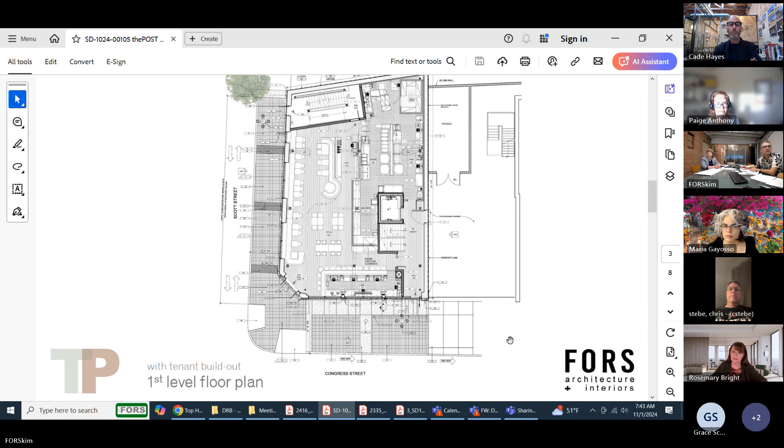Any questions? I'm going to go to the facade and show you the minor modifications from here. I'm going to zoom in a little bit, because it's really about these two facades.

In the previous design, on Congress Street, there was basically three or four changes or minor modifications that we did. One, the windows were operable. The windows are no longer operable.

These windows went back to the previous photo that I'm showing you, based on the national back and forth for months with national approval. So this is the spacing and the size that they wanted on the windows, and also the base they wanted on the windows. So these windows are no longer operable in any way.

We are lucky enough through the demo process to be able to expose the original cast iron columns, so the facade is the same, no punctures, no changes to the facade. But these are fine-tuned details that we did with the National and with SHPO. We also eliminated the more modern glass doors that were frameless with modern hardware, and they wanted us to go back to a single pane standard that fit the era of the photo I was showing you. On the columns, which is really the largest change, we had faux stucco columns going in front of this facade to mimic these, because the facade had been changed so much that it was pushed out and wasn't in the original plane.

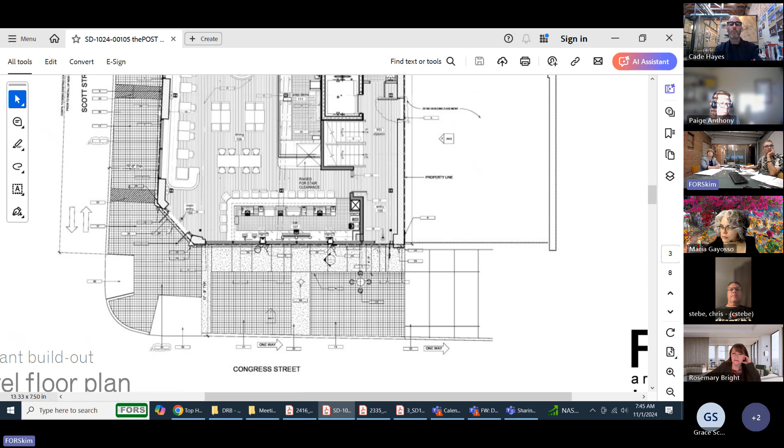Going back one drawing, the windows are back to being in the original position, and we have the original columns. We are painstakingly refurbishing and rehabilitating behind the metal. This is part of our demo process - instead of mimicking, these are the actual cast iron metal columns that we are refurbishing, along with the window spacing. This is them uncovered now; the GC has removed multiple layers to get back to them, and we think they're in good enough shape that we can keep them and refurbish them.

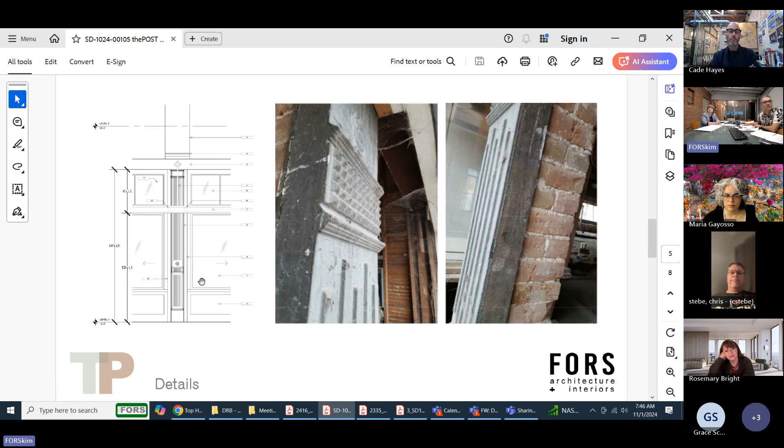So this is a detail shot of that elevation. Let me zoom in a little bit again.

The other item of change is they also really insisted on us keeping the original wood windows. So these are the original wood windows, and the composition of the original wood windows, which the owner and the GC are going to completely refurbish. Those windows mostly are in place now, but they're going to be rehabilitated and refurbished.

Let's see what else on the facade. I think, as you can see on this side, the Scott facade, the east facade, is the same item. There also we're going back to the original opening that it was originally. Right now the openings are below this line where my cursor is. We're going back to the original opening and to the original lintel height of the whole facade. That was in the original approved DRB, but the change here is the spacing of all the window openings and the mullions and the glass.

Again, no operable on this side, and the same thing with the windows here. These two openings are staying. The only change now, in the final drawing that HPZ approved locally, is we're going to change this to a window. The existing is a window, and we're going to keep the opening as a window and just replace it so that the frame matches the storefront framework.

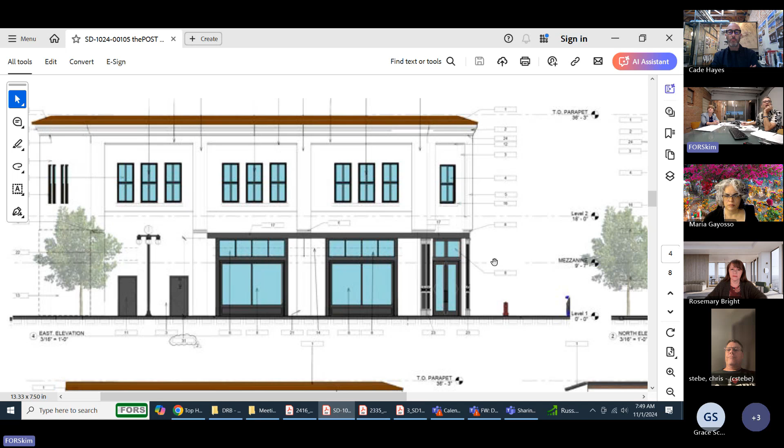The other item, and I'll show you the shade study, is that the National and Federal have approved it without the canopy. One of the reasons is they painstakingly went back to this facade, which was the open facade without a canopy - never a canopy on the east facade. So we've come back to that for their approval.

On the west facade and on the south facade, I will start with the west facade.

One of the reasons this project was originally connected to the Hexagon owner building—that building sold, and this building sold separately, so they're no longer the same owners of the two lots. So there was a large opening here that was eliminated, and we're retaining the original brick, with no change to that. The second item is the paint on the second floor.

We are retaining the paint, which is actually in good condition. We went over that with site visits with National Historic, SHPO, and more recently with HPZ. The guideline was just to keep the painted upper facade, which is in good condition, and not try to sandblast the old brick because of how soft it is.

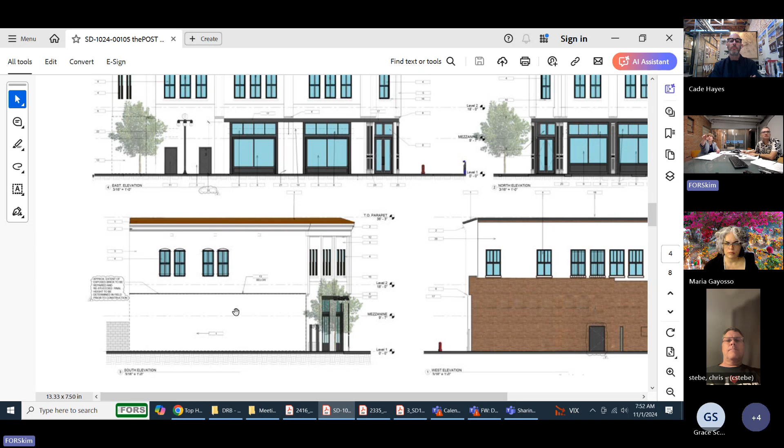You'll also notice, if you could zoom out a little—the south facade has that tile cornice, and so all three sides with that cornice would have the white stucco facade, so they would kind of wrap around and be more uniform in their look.

Okay, and then next piece—I'll move to the next page. Kind of went over this.

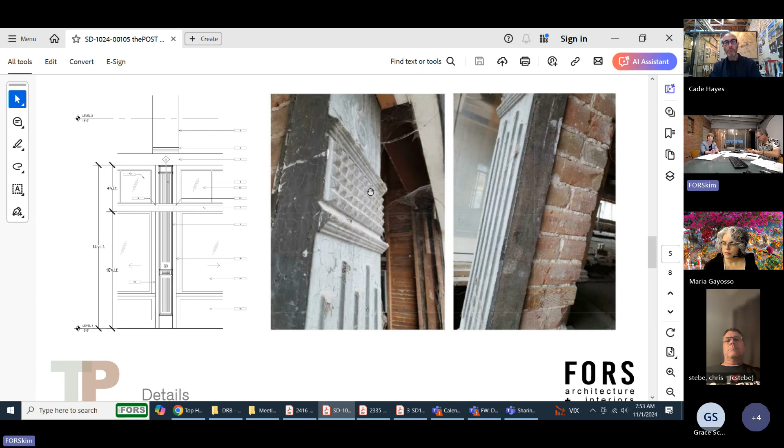I thank the city because the demo permit allowed us to uncover a lot of items that we could save, and that was a great find. So now we've removed a lot of structure from the building, and we have to stabilize the building as soon as possible.

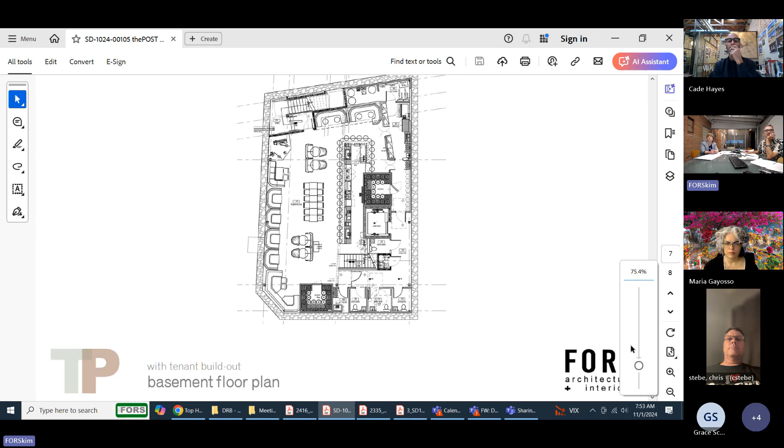I'm going to show you this and then go back to the shade study. This is the basement tenant. By the way, the tenant is the same on all three floors, but it's three separate concepts.

I thought you guys might be interested in this. I won't spend much time, but this is the basement tenant, which is mostly a bar, and also has all the bathrooms for the first floor and the second, for the ground level and the basement. It also has a lot of the backup storage and cooling, because the floor plates are so small at 3,000 square feet.

We really couldn't get a typical restaurant to work on the street level. So the basement is really supporting the street level restaurant and also providing a second concept, thank goodness, that has an open stair that comes into the bar.

And then on the upper floor, the second floor, this is a separate concept by the same owner. I can tell you who the owner is if you guys want to know—I think I'm allowed to say that, and I think Zach doesn't have an issue with that.

This is a third concept, which is more of a bar lounge and has a little bit of games—a separate concept. This kind of mimics something he's already done with his 9 other restaurants and bars that he owns. He has a very unique restaurant and food that he serves, English style.

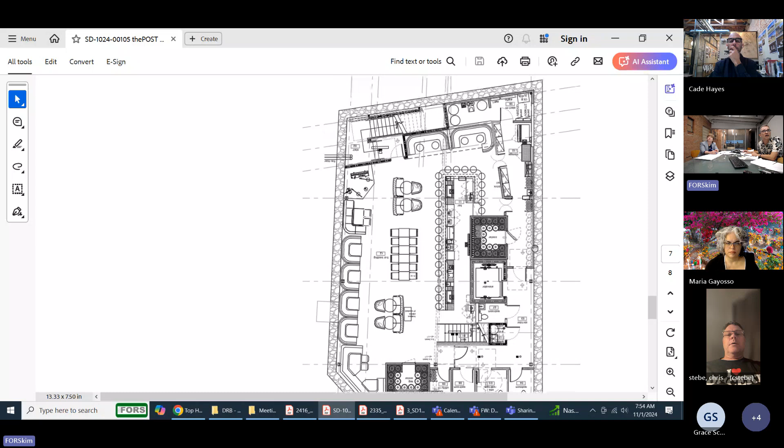So I think part of the hardship and change for us was when the time changed. One second.

When the time changed from the new mandate from 2 o'clock to 12 o'clock, it significantly changed our shade structure, but also dealing with national and federal agencies meant 8 months of arduous back and forth with them. Our shade right now, with adding the tree, only sits at 28%. And I know it's crucial that we're trying to get approval to get structure into the building to stabilize it.

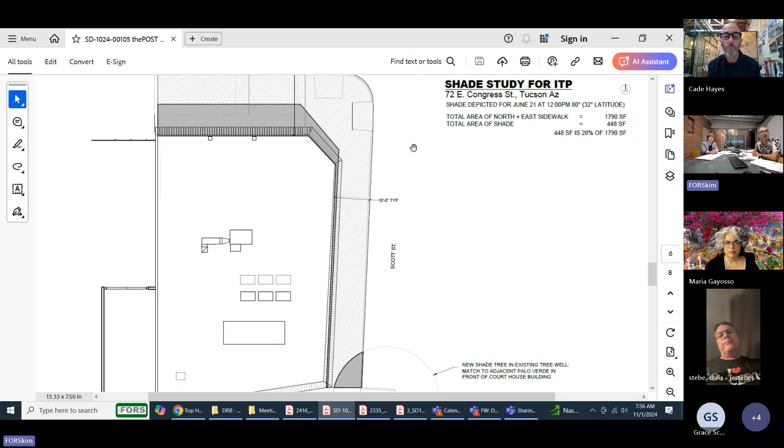Our hope was, based on the federal guidelines that we're maintaining for the facade, that we really want to maintain the new facade based on this shade study, which I realize is almost half of the required shade. I've done many downtown and I always meet the 50%, but this is one where we're just having a really hard time meeting it, due to some financial issues and the era of the facade we're trying to maintain.

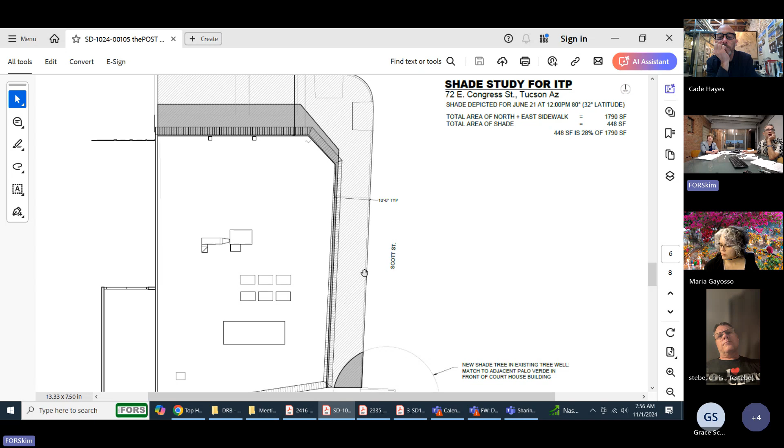There's also a lot of utilities in the ground, so we've shied away from adding trees in the ground. We know we can add this tree down here, but because of the narrowness, we've shied away from trying to do shade through trees. We'll discuss that now, but this is our latest shade study based on the approval we got Monday night, Tuesday morning.

So in closing for us, I know I've talked a lot and I apologize. I think our goal, now that we have the national federal SHPO letter and we had a great HPZ minor review for the modifications, we're hoping you guys can see the changes are fairly minor. I realize we're asking for a hardship on the shade study, but we're really hoping to get this approved now that we've been through those long processes, so we can move forward and get the shell permit approved.

The new structure, if anyone's interested, is basically a brand new structure within the building. Not as modern as what we've done at the Rialto, but similar to what we did at the Corbett building, where it's all new structure that's going to meet the latest codes. But yes, very expensive, basically to hold up all three floors and the walls.

And I've spoken a lot, Zach, I don't know if you want to add anything. I was just going to say one thing, sorry, I've been hiding out here. I'm not a morning person, and it's been a long week. I'm getting married tomorrow.

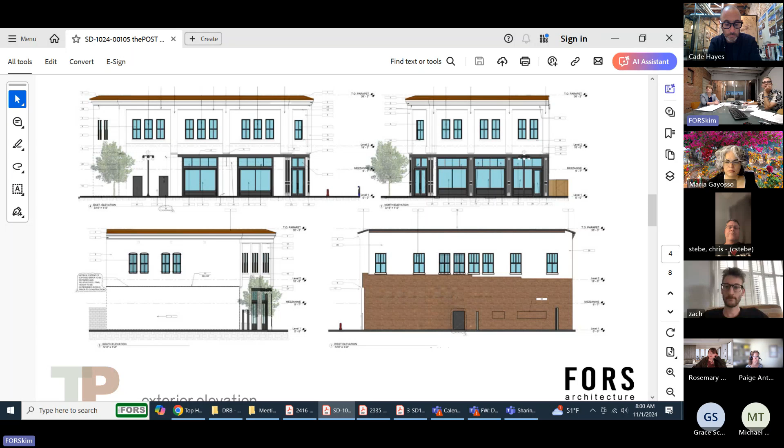Well, all right, I'm excited to see something happening with this structure. When the Thrifty block was originally taken down, this was going to be an 18-month flip on this building, if I remember correctly. So 18 years later, we're finally getting it.

Miguel, you mentioned awnings, but you didn't say, is that off the table now, or is that still an option you're exploring? Do you want to speak on that, Zach?

Yeah, so we've taken the awnings off. That was something we discussed with Historic. Miguel, if you want to go back to that first picture for reference, this is what we're trying to restore it to here. So we don't have the awnings because they're not there, there are none in this era. The full facade is kind of in view. So that's what we got approval for from the historic bodies. I think, to be honest, the only issue that creates is with the shade.

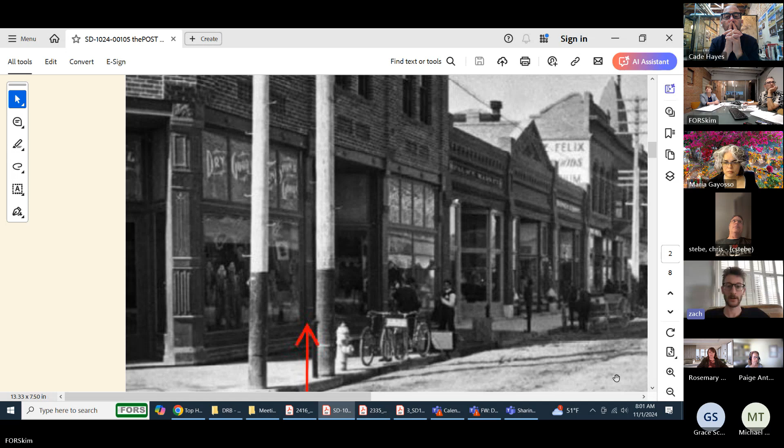So we're hoping that there's some flexibility there. Well, what I'm searching for is, did they give you a hard no?

City Historic was fine either way, but Park Service preferred no awnings. We are approved as of Monday - they sent the official approval, and we can certainly provide you with that documentation. So we are approved without awnings for part 2 as of Monday.

For the awning, the historic review, there were no drawings or anything provided. It was mentioned, but historic said if in the future you choose to provide the awning, you need to come back for historic review. So it was approved as it is without the awnings, but if in the future you still need the awnings, you need to come back for historic review.

Correct, exactly. We would have to come back at that point and request it. There were a couple - that was kind of where I was going, was that if you presented both, and they said if you present this without the awnings versus with the awnings, after seeing both, you will get approval. That was the terminology I was looking for.

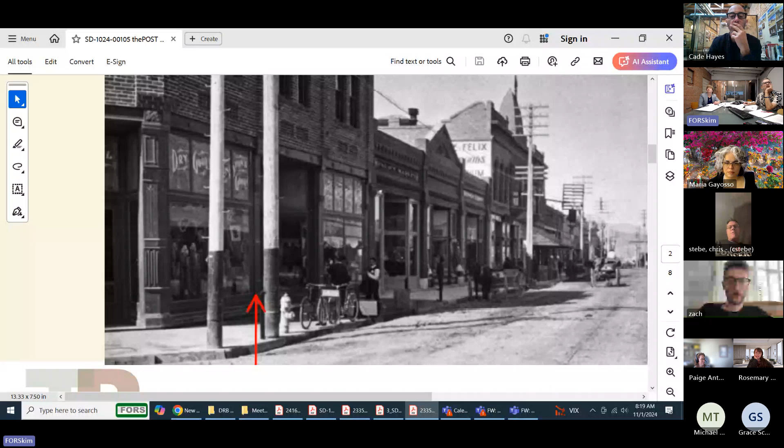Are you seeing the image right now? Yeah. Sorry, I thought you were. Can you see the shade study? Mm-hmm, yes.

So this is the shade study we did with adding 3 trees. That got us a lot closer, up to 48%, without the federal one.

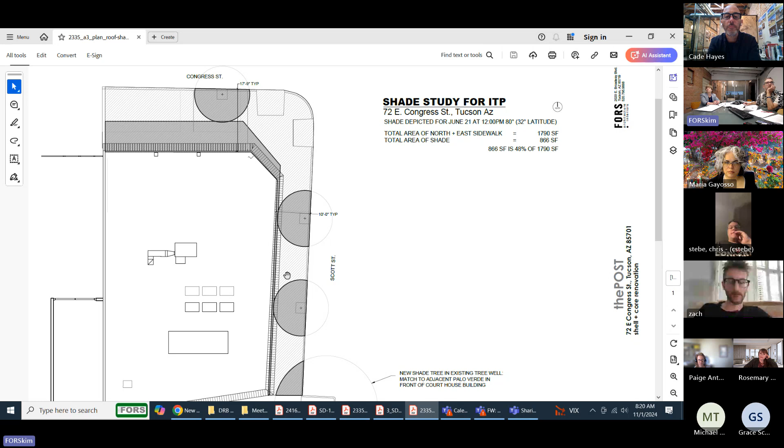These would be trees with limited canopies, and we'd have to go over the parallel parking. We need to canopy over that parking area because of the narrow sidewalk. We could actually pull this one in a little bit on Congress.

By adding 3 raised planters, we could get it up above 45%, which is what we were trying to do. But because of the narrowness, and I didn't know if you guys were frowning on the raised planter—these trees obviously won't get as big, so it has to be the right species. But we could up our shade count based on this.

Chris, you're muted, I'm not sure if you're trying to speak. Does anyone else have any comments or talking points on this one?

I'm kind of scrolling around this image. I think this is a good effort. I think it'd be good to explore if the tree on Congress could be at grade with a larger planter, if you can—it seems like there's enough of an offset from the fire hydrant line. I don't know where that sewer line is, or if that's actually to the west.

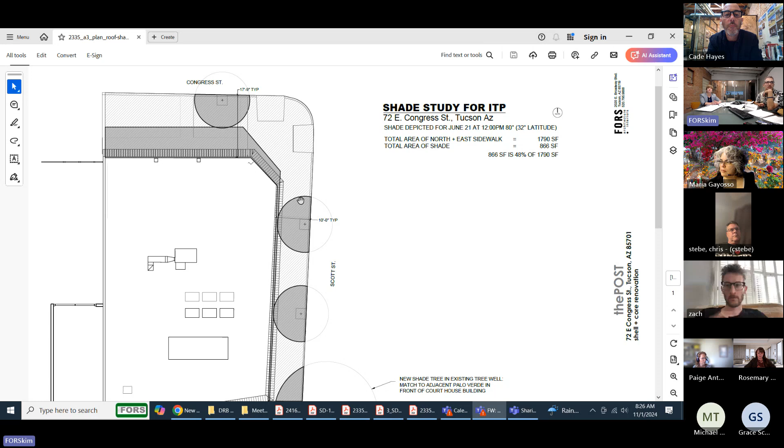Yeah, the downspout drainage—so we've been more successful promising trees if they're below grade, versus when we've run into issues when we haven't been able to put them in below grade, like at Corbin. Part of the issue too, with all the work we've done on Congress, is that we have to maintain 8-foot clear between obstacles. They want at least an 8-foot wide sidewalk.

In the future, the owner would love to be able to do a patio too, because that's our big thing, coming back to you guys in the future off on Congress. That would be an ideal situation, but it's off the table with historic right now.

Part of that issue is maintaining the 8-foot requirement and where we put the tree based on that requirement, which I know they're going to want on Congress. In addition, we have downspouts draining on the east side, and sidewalk scuppers out to the street on the Scott side as well, so we have to be able to drain the roof.

Could that drain be used for the trees, into a tree planter maybe? I feel like you're going to get more sidewalk if you have an in-ground tree planter with a tree grate, rather than a raised planter, which would create more obstacles with the parking meters and fill up that sidewalk with planters. And yeah, the water could potentially water the trees.

Yeah, I will. Well, I think the detail might help too. So, yeah, on this. Oh sorry, we're not seeing your screen share yet. Do you see? Oh, it dropped, sorry. I apologize, when I moved the other one off. Can you see the exterior elevation? Oh that's weird, sorry.

Can you see the exterior elevation? Yes, okay. So on the Congress Street facade, the SHPO had asked us to narrow the stucco columns that were on the previous approved submittal and make it more of a continuous storefront look.

So we're using an aluminum system, it's in the presentation we originally submitted to you. That's the Quaker windows, which are nationally approved, so those are an aluminum framed window system. The SHPO wanted us to have it look like that continuous facade, similar to the existing building, so we could tie it in with the existing cast iron columns. So all of it has the aluminum windows.

The bottom portion is a metal panel that will match the color of the window system. And then we'll infill the structural supports on each side of the columns and cover those with the metal that will be part of the window system, so it all reads as one continuous storefront system in the same dark bronze color, tying it in with those existing cast iron columns.

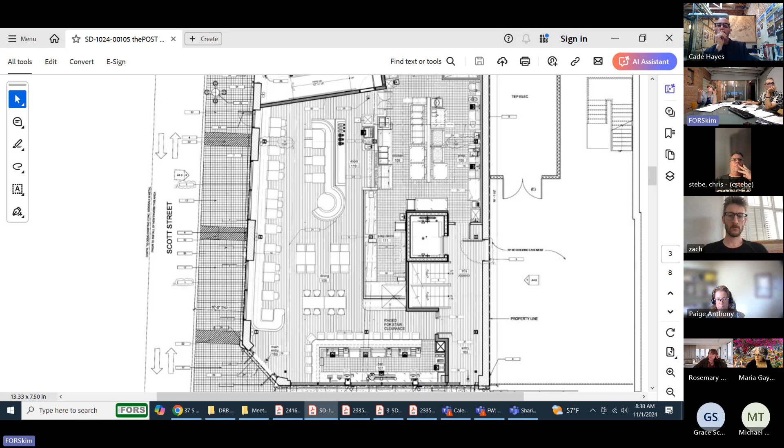So we're keeping the existing wood joists that support the first floor and the second floor. But in order to stabilize the masonry structure on the outside and tie it into the diaphragm of the floor system, we're putting in new columns in the basement and on the first floor, and then some beams to add additional support to those existing wood joists. Also sistering the joists. This allows us to have this type of occupancy of a restaurant with bars, furniture, kitchen equipment. If it was just the existing joists, they could not support the load for this function.

So that additional steel not only helps stabilize the masonry walls of the existing shell, but it also adds the additional support needed to occupy as a restaurant and bars.

Cool. Yeah, we don't have the CDs, or at least I don't think they're available yet until your permit gets issued, but I'm really curious about that. That's a lot of work. So I admire you guys for doing it.

A couple items - we had to pull the columns back off the Congress facade, and this went back and forth with National SHPO. On Congress, you can see the columns are pushed way off the facade, so they're not as noticeable. But we had to retain a certain column line.

But every one of those joists also has to be reinforced. So although we're keeping them, we're having to add a lot of reinforcement, not just to the base structure, but also to the joist system.

But retaining them is pretty cool, and being able to retain the wood decking from below, which took a lot to show - SHPO and historic - was important versus putting a false ceiling in there.

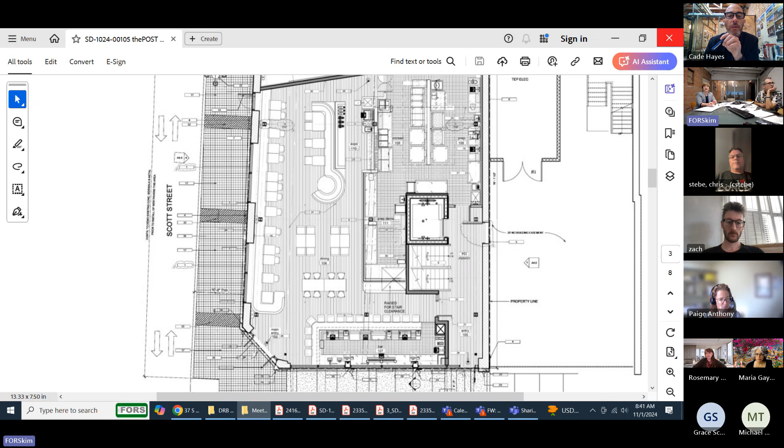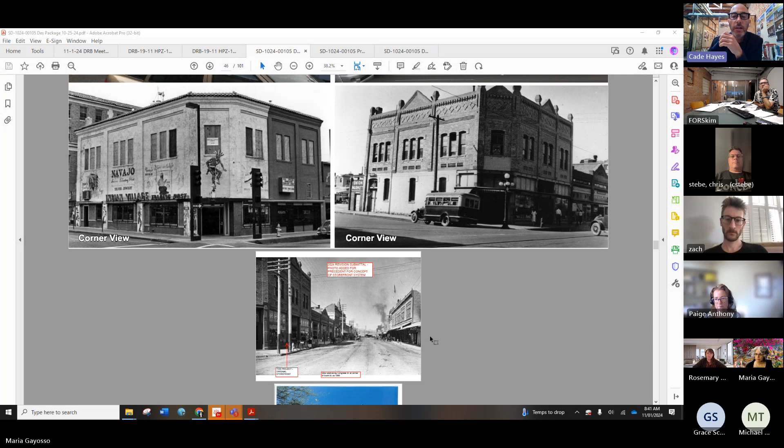Just a minute, we have like I can share 3 screens here. Okay, that's the one right there. The photo on the right, where you guys were discussing the door that's been infilled. So sorry, the other photo, that one? The other one. Okay, yep.

This, yeah. Can you zoom into that east facade tighter? Yeah. I was just wondering, through your... so there's this double door. The Union Market is no longer there, but I'm assuming that that window was cut into a door.

So I'm just wondering what the infill is, and if that proportion could be adjusted, I mean what you guys have maybe uncovered in that window when Grace mentioned the proportion of that window and how you're going to maintain it. I'm just wondering if that's accurate, what you've uncovered in your demo, and if that proportion could be adjusted. 'Cause I think if you go to the design elevation, it's a little more squat and in line with the head of the door.

So I'm just wondering if there's more height above those doors based on that image. Well, in our walkthrough, I guess part of the issue is that facade, as you can tell, has been studied and changed many times. So the header now, we went over that along with historic, with our site review.

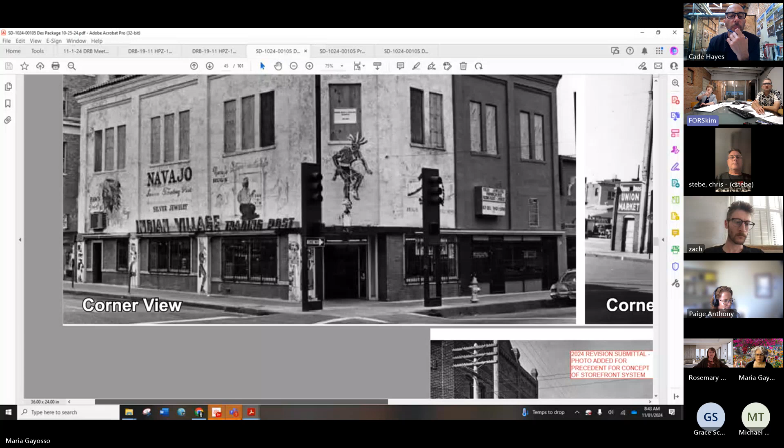I mean, the reason they approved this one was there was a version that showed it this way, but I think it was purposely shown. They're looking at the screen. That height, right? Yeah, that you see right there, that was from going back and forth with historic versus having one that's floating up higher. This was the one that painstakingly was what they wanted us to match.

I mean, we did go back and forth on this multiple times with them. Okay, to change that now would be a change to the approval also. Right. And I don't know that they would approve it.

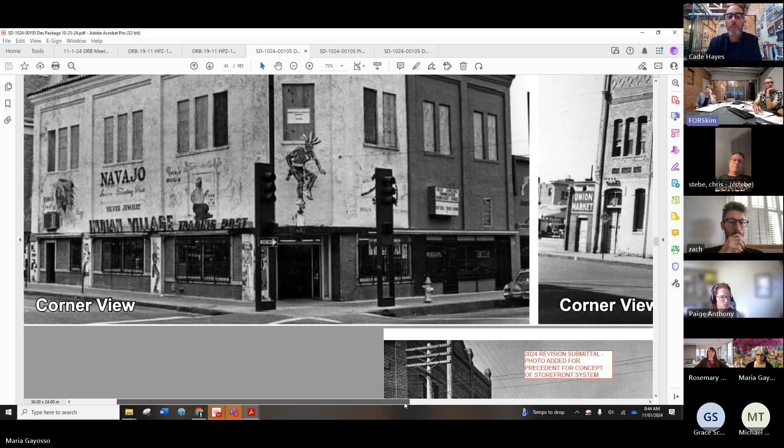Okay, so the National was okay with it because it was existing, to just replace the existing window with one that was compatible with the storefront on the other openings. Part of their issue on this facade has been that same facade on Scott.

It's been altered so severely. Also, as you can see even in these photos, we got 4 photos with 4 different facades. Is that their priority? I think it was perhaps not introducing another opening here.

I'll share my screen, I'm going to go back to my screen. Their priority, I think, was in not altering this opening, raising it kind of like it was on that photo on the far right. I think the priority was in bringing back the 3 higher openings on the east facade.

And because this area has been changed so dramatically over the course of 120 years, I think they didn't want to play with that opening, with the arch, which wasn't of the original era. So again, I think they wanted to downplay this and make sure the prominent features were the focus. That's the feeling I got from them.

Thanks for the explanation. I appreciate that.

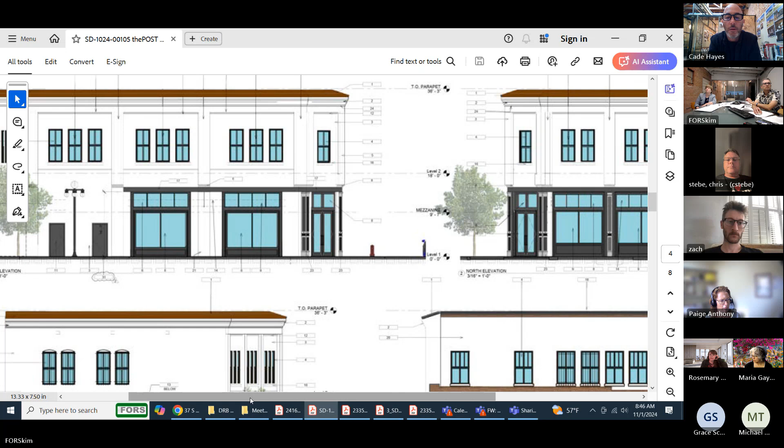So Miguel, the other item that we sometimes focus on with facade renovations is facade mounted lighting. One of our criteria is whether the building or improvement provides down-shielded, pedestrian scale lighting from the building, and doesn't necessarily depend on city street lighting for lighting up the facade and the pedestrian space around the building. Is there any lighting proposed on this project?

There's the historic street lights right outside of the building along Congress, and there's one along Scott as well, that are being maintained.

So the thought right now was, because we have such large openings, the idea was not to provide any down lights down low on the building. There was an odd LED that we felt was inappropriate, and National wanted us to rip it out. There was an LED up high running along the parapet, and they asked us to remove that.

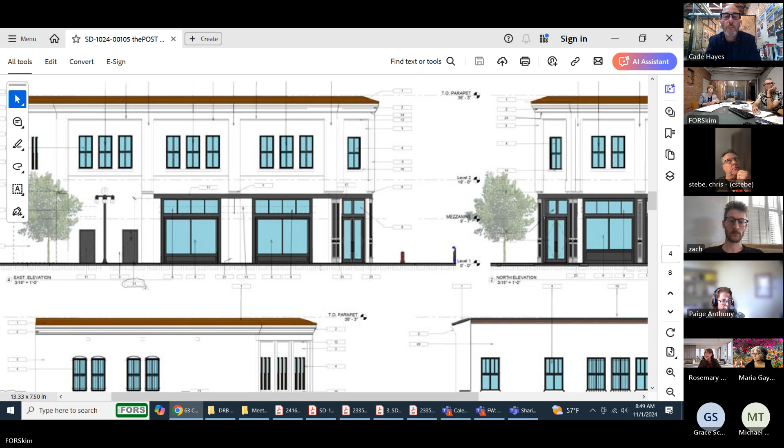I know there's a streetcar power line there, a power pole.

Yeah, there's one on the corner, and then there's the historic one right in front of our building, the four-lamp historic. Oh, you've got one there. Okay, I couldn't remember if there was one there, next to that fire hydrant. And there's also one on the southeast corner. Yeah, we have another one right here, at the back entrance.

And remember, our openings are now going up to the original lintel, above 15 feet. Right, so I think what the intent is, what they're really looking for within our criteria within the Rio Nuevo, is that this corner entry would have some sort of lighting, not just interior lighting, but because it's inset just a touch from those columns, some sort of lighting to indicate that's the entrance, and some sort of downward facing lighting to brighten up that corner and indicate the door entry. I believe that's the way I read the intent of that provision we're going to get to.

Yeah, we could add like a downlight that we could conceal so it doesn't affect the facade. Right, I think that's their idea, is to make that corner...

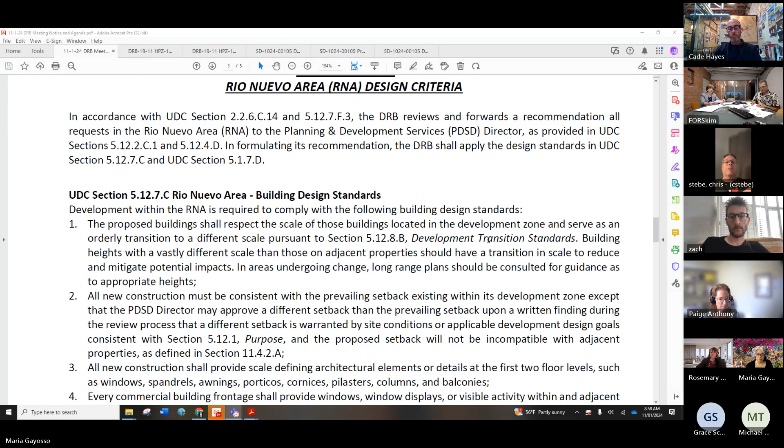So I'd love to open this to the board and hear where you guys stand. Well, would anyone help to go through the list and see where we stand? That's what I was asking, if we want to go through the list, or if we're almost at a point of maybe not even needing to.

Let's go through the list, and Chris, that number 6 regarding the lighting too, I think is going to come back around. So maybe start from the top, like Paige is saying. Yeah, I think that'll help, if we are going to ask them to come back so they can come back and be successful on the second review, and give specific items - number 1, 2, 5, 6, or 14 - that we want them to reinvestigate.

Proposed building. Before you guys do that, can I chime in for a second? I'm sorry to interrupt. Sure.

We really have to get approval, or we're going to be in a bad position. That's not a concern of mine, Zach. If you guys needed to get approval by a certain date, then the timeline and getting on schedule and having your plans together is not a concern of this board.

Understood. What I was going to propose then is tell us what you are willing to approve. Let's get it approved, even if it's in conflict with the National Park Service, and then we'll come back at a later date. There must be a process for requesting a change.

Mr. Chair, members of the DRB, if the DRB decides to continue this case, we could also explore, instead of waiting until November 15th for the next DRB meeting, moving that meeting to next Friday, November 8th, to review what the applicant comes up with.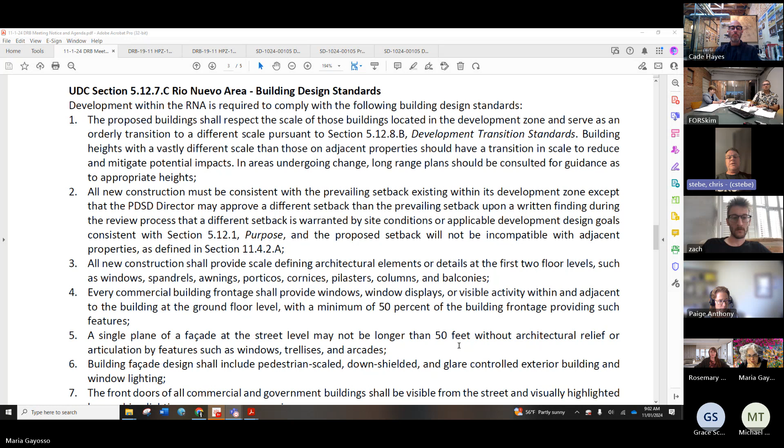Okay, commercial buildings should provide windows, window displays, minimum of 50% of the building facade. They're actually opening that building up a bit, which is fantastic. I think we're good with that one.

I lost my screen here. I'm gonna share again. Yeah, someone took you over. All right, we have mutiny.

I don't even know if your facade is more than 50 feet long. It's pretty close. Without architectural relief, you've got plenty of architectural relief on this building.

6 is one that I was coming back around to. Building facade design shall include pedestrian scale, down shielded, glare controlled exterior building and window lighting. We're in a little bit of conflict with that, whether or not the building provides this down-shielded lighting other than what comes through the windows during operational hours.

Any other discussion on number 6? I think this is one we're gonna put a note next to. Yeah, I agree with adding entry lighting as discussed.

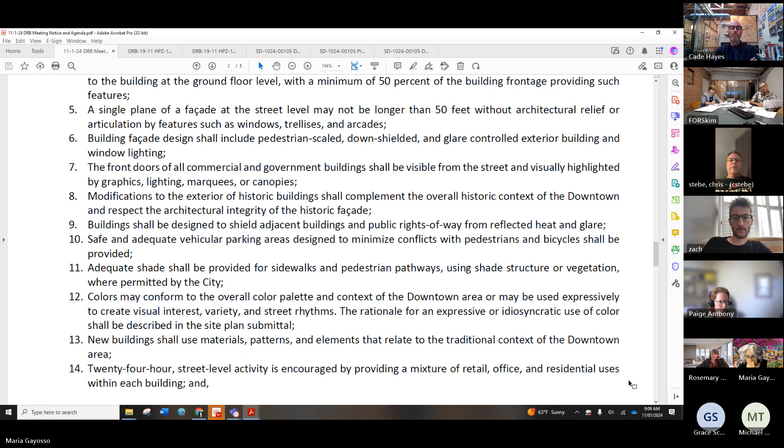And then there's a second set of criterion we look at. Oh, we have number 15 still - I always forget the 15. Entries are directly accessed from the sidewalk, which is here because it's an existing building.

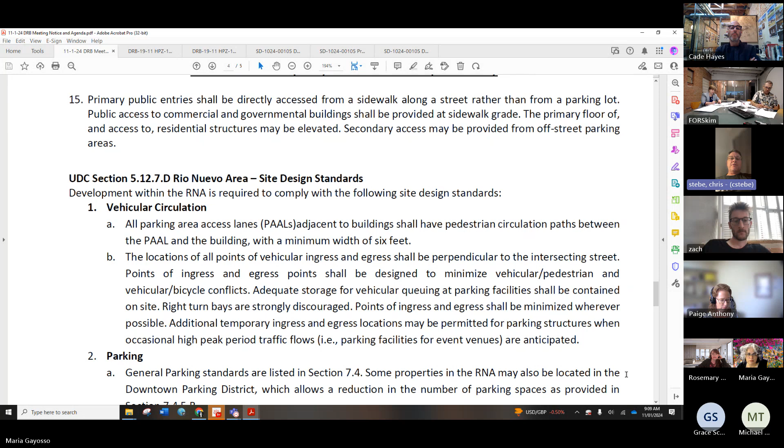Vehicle circulation, I think we can skip that whole section. Parking - you're using street level parking. There's actually 2 spots right in front of your place, which, depending on who you talk to at the city, could be beneficial to you also.

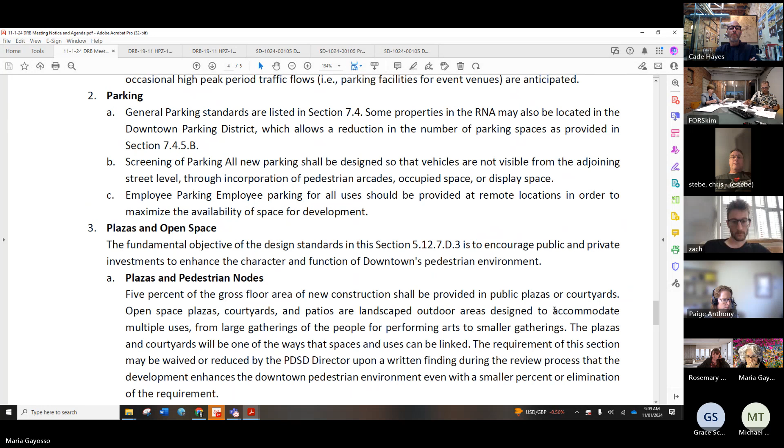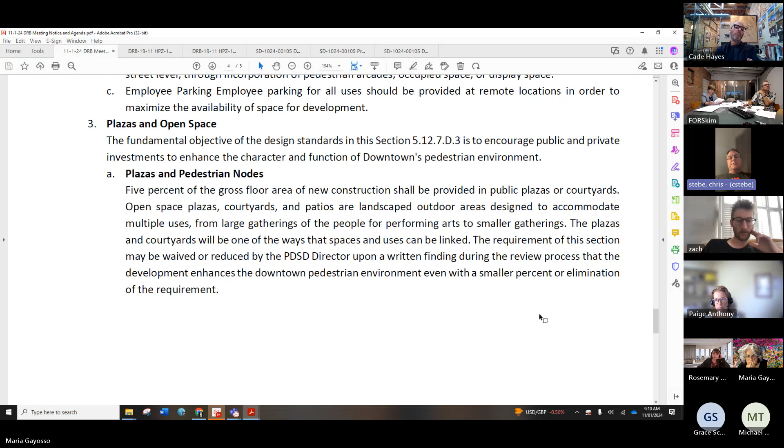Plazas and open space - this is really to encourage public and private investments to function the downtown pedestrian environment. You're not providing any new gross floor area, so I don't think we're held to any public open space plazas for this project. And your view sheds and linkages are maintained in current condition with this.

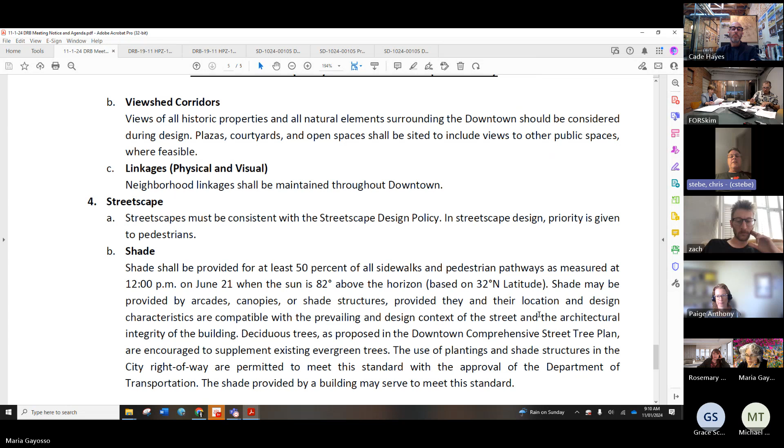So streetscapes is our big one. Streetscapes must be consistent with the streetscape design policy, and streetscape design priority is given to pedestrians. You're not really impeding anything in the sidewalk, which leads us to shade. This one is 12 noon on June 21st, and 50% of sidewalks and pedestrian paths need to be shaded.

This is the one you're asking for the most relief from, is 4B. Right, it's really, it was lighter on the lighting - 4B is really the one that we're asking relief for. Yeah, 4B is the one that, unlike the others - the lighting and adding some bike parking - are ones that we as a board traditionally have felt comfortable adding as conditions to an approval. 4B is one that we've traditionally not.

So I want to open discussion up to the board again on next steps, if anyone has opinions on where we stand on shade studies - we've kind of had a hard line on shade studies the last few years.

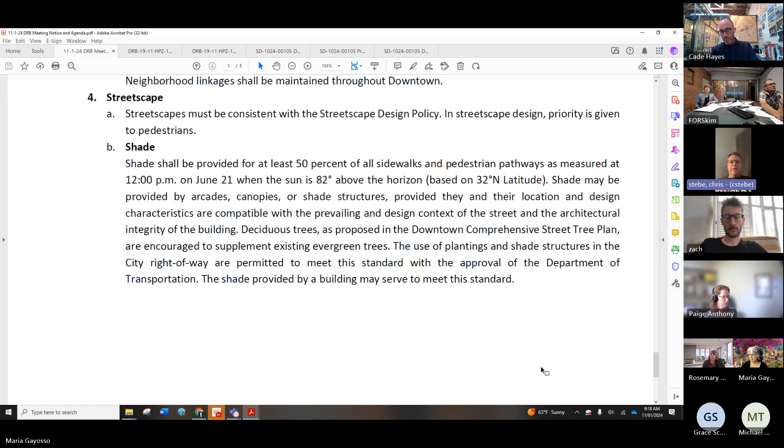Truthfully, Zach, I can't necessarily answer that question. Okay, talk me through your thought process. Yeah, I can't tell you what to design or how to mitigate challenges we've come up with, or how to meet the requirement. We just need to have 4B. We need something in front of us showing that you have 50% shade on that sidewalk at 12 noon on June 21st. Miguel, do you have something that shows that?

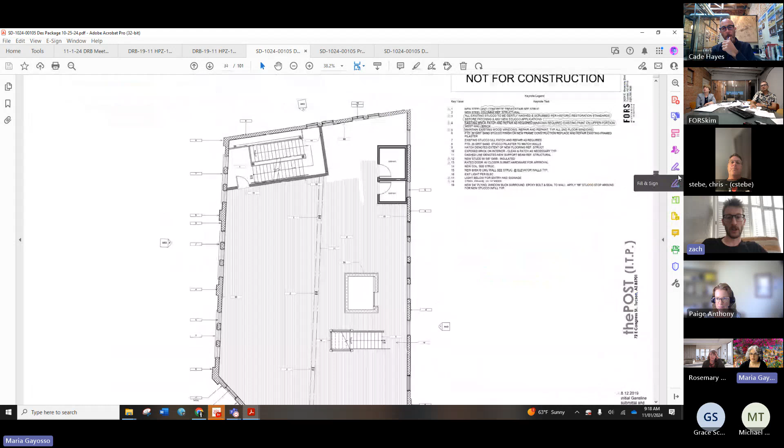Yeah, pull it up. We have a study with the shade structure. Maria, are you pulling it up? I think Maria's beating me to it. Let me find the CDs we're looking at. I have it, so I can share it. It's down towards the end, Maria, at page 64. This is a design package that DRB received. Sorry, there's over 100 pages.

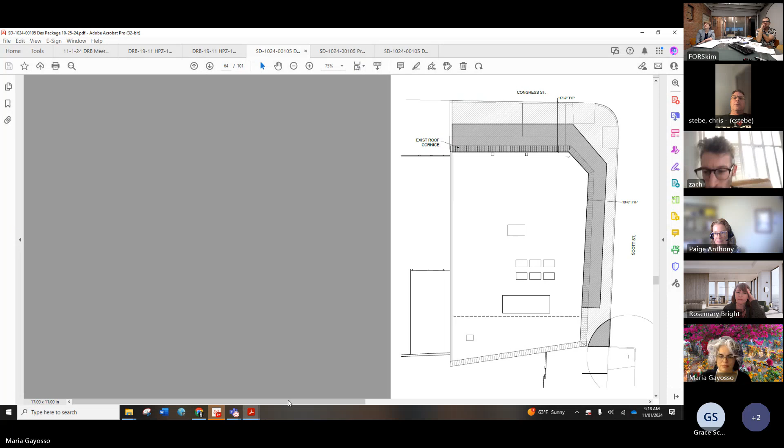So we're at 54% with the canopies. And the tree that we may not be able to add, because it's probably on the federal building's property, is 3%. So if we eliminate that, we're still over 50. That's only 3, so can we?

So Chris, can we go with this plan and have this approved today, again, to keep us moving and give us an opportunity to come back? We realize there's no guarantees, but that's kind of my last ditch effort to get us approved today.

I know it's not a consideration of the board, but hopefully, at least on a personal level, you can understand that we're really trying to. We got some pressure on us to make this work.

Mr. Chair, members of the DRB, let me see if I can understand the proposal. We leave the design package as it was submitted. We would eliminate all the wording that said optional in the design package before we can issue a decision notice, and just leave this as it is. Then at a later time, if the applicant would like to pursue removing the awnings from the design package, that would kick off a revision of the design package that would need to go again through the PRS and the DRB for review.

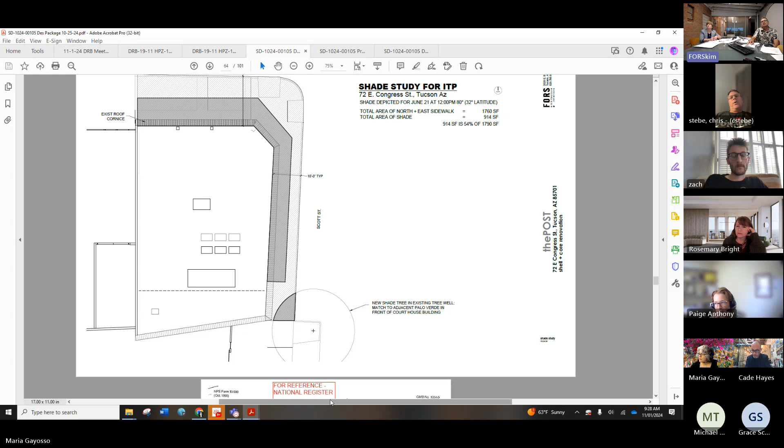Because we want to try to get it closer to - and I'll share the screen - we have this study. We know we can make it work if it works within TDOT in the raised area. I would prefer to stay on the original track, which is basically, can we make this shade study that's up on your screens, the way you were working towards, Chris, and work with TDOT to see if there's acceptance of us adding these trees, and if we can't, can we add them above grade?

I was thinking we could actually make this part of the record. I was hoping we could put a condition basically saying that we had to meet this, or we had to come back to the board to get approval. I'd kind of like to walk us all back to stay on track with this concept.

Can we get approval? Sorry, obviously going back to the canopies was not an idea that anyone liked. That was a page in the submittal, it's not like that was not on the table at all. We had removed it because of historic's input.

Going back to the trees, can we get approval if we provide canopies of 50%? And again, if we can't, we're going to be dead in the water anyway. So we're going to be in a position where we have to come back and demonstrate that we can't meet it, and you'll have to approve it, or we'll have to meet it. Does that make sense?

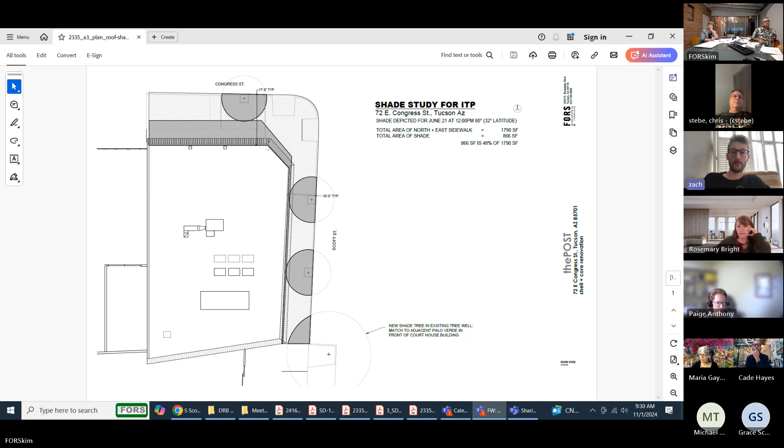So Mr. Chair, members of the DRB, if I can provide an opinion, I think from staff's point of view, just to make it a cleaner submittal and for the applicant to explore their options, come back to the DRB and the PRS next week with the revisions on the shade study based on the findings with TDOT.

Hopefully Dave's not on vacation. I'm kind of leaning in that direction, Maria.

I'd like to continue this and give you guys a chance to do a little back research and explore a couple of things with TDOT and with PRS and have another conversation, because I think if we start introducing conditions here, we may be sending you guys on another lap, and I don't want to inadvertently send you on another lap before you get your permits.

Do you understand where my concern is? That I don't want to approve something, or approve it with a condition, that to meet that condition sends you on another lap with all these people and holds your permit for another month.

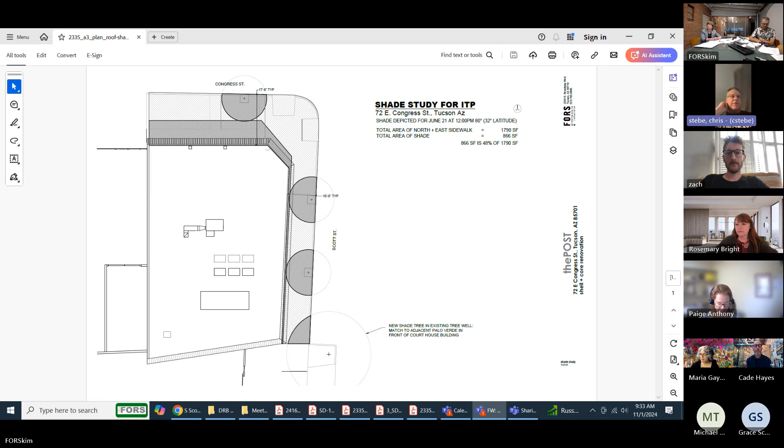Appreciate that. So have Miguel, any other? Sorry, yeah, I want to keep the discussion open to the board for a minute, Zach and Miguel, and let's try to work our way out of this. We've been here for 2 hours now, so let's try to work our way out of this and figure out what our next step is. We can talk hypotheticals for another hour if we want, but let's move forward.

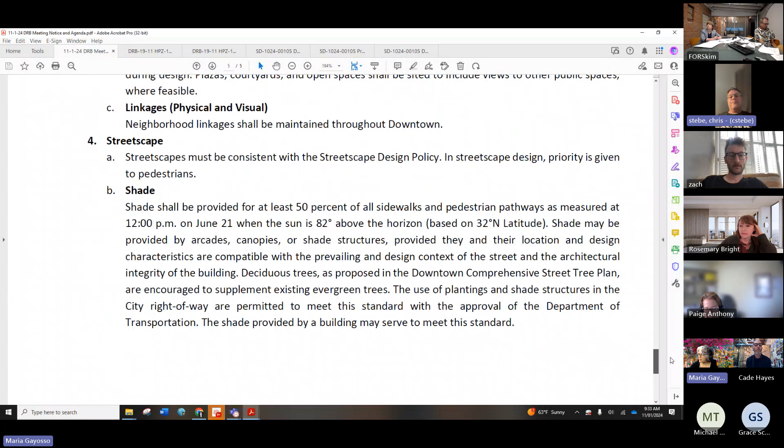Geez, we even had another thing on here, didn't we? No, or is that this is our only case today? I didn't miss it, that is it, okay. For some reason, I thought we had another group of people sitting off the side waiting.

Kate, Paige, Rosemary, Grace, it's up to us. I want to take a little straw poll. What are you guys' thoughts on where we should go? Yeah, I feel like it's disingenuous to approve it when we really don't know what's feasible, and I think we do need to have another review.

And maybe we could also see what people's availability is for that. I agree, before the next meeting. I think that's a good compromise because we're meeting within a week to try to help out their schedule, but we do want to see it again. We want to see what they've been able to learn about the feasibility of doing these street trees. But yeah, not making them wait two weeks for that.

And I can also add that we would try to make the historic review happen before your DRB that is coming up. Just so we need to know, and then I'll ask for materials from Miguel and Kim, and I can try to let the PRS part of the review happen if there's need for it.